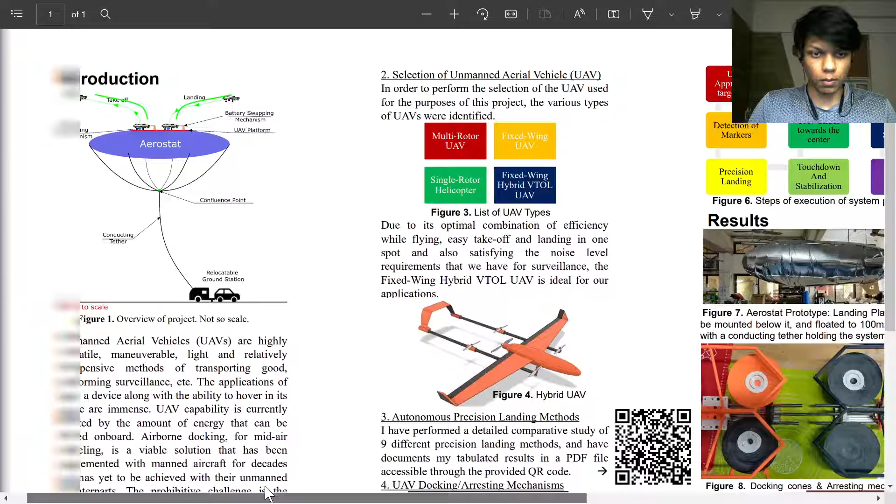So we could just take a look at this diagram right here. And here we can see that there is something that we call an aerostat. Now, an aerostat is in general just an airship that is going to be filled with a lighter than air gas, such as hydrogen or helium. Helium because it is going to be less explosive, less volatile, a noble gas.

And on top of that, we will be having a certain flat base, which we shall call the platform, on top of which we'll be having one or more UAVs. As shown in this diagram, we can have two UAVs. Now the UAVs have the ability to take off and land from and onto this platform. And while they are on this platform, the goal is for them to be able to swap their batteries out so that when they run out of battery, they're able to quickly turn around and fly back up again.

And finally, the aerostat shall be connected to the ground using a conducting tether. This tether has to be conducting as it has to be able to supply power all the way up to the top. And then there will be a relocatable ground station, which should ideally be able to take the aerostat, and rather the entire system, and move it to a different point rather easily without any more setup costs or more setup time.

But why is it that we even need a system like this? This may seem like an overly complicated solution to just have UAVs roam about here and there, but there are a few very good reasons for that. That is because in today's world, we have an increasing need for UAVs, and that is because you could have a million applications for them.

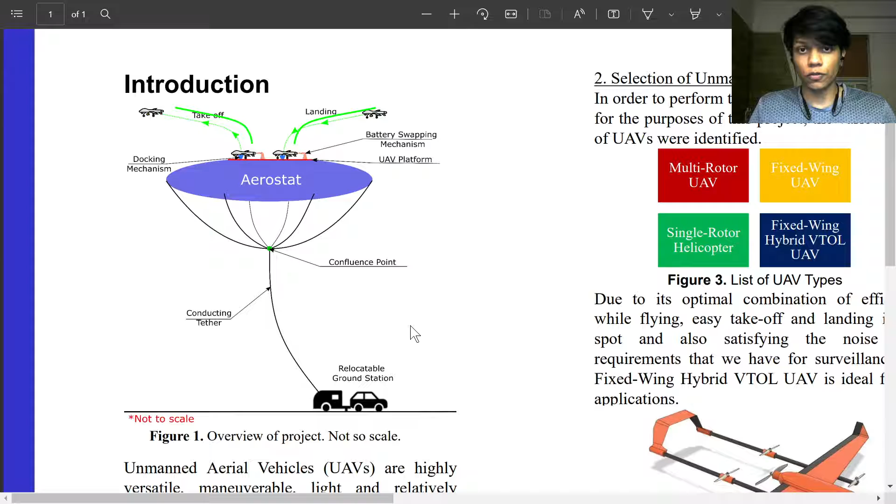You could have them in the commercial sector, where you could have companies like Amazon perform delivery of products. You could have it in the agriculture sector, where you could autonomously have UAVs fill in fertilizers and pesticides for the crops, and in fact even perform seeding of the ground. And you could also have military applications where you could have surveillance and applications like that. The applications are immense in simple terms.

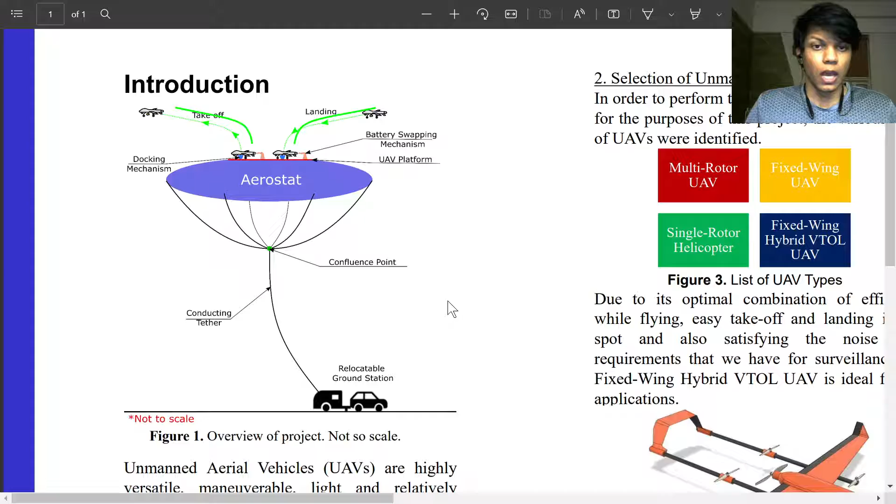But the problem with UAVs in today's world is that they have a rather short range and they require expert flyers. And both of these problems are ones that we intend to solve with this project. So with this project, what we intend to do is that instead of having UAVs be something that are piloted around by expert pilots, which costs time, money, and effort, we shall have the entire flight path be automated and pre-programmed. And not just that, the hard part of why the pilot is required in the first place is the landing, which is what we shall be aiming to make autonomous.

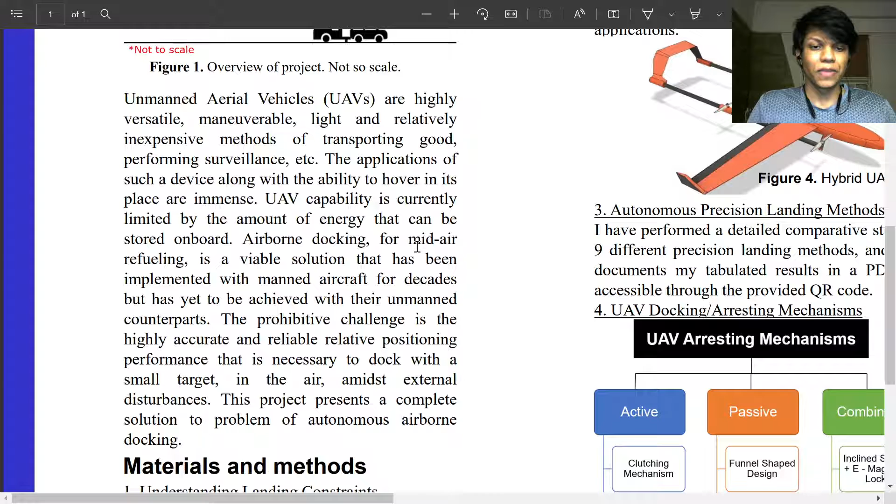And secondly, in order to solve the problem for the range, we shall have the UAVs come on and autonomously land onto this aerostat. The battery shall be swapped with a fully charged battery, and then the UAV can take off. And while the UAV is flying, that discharged battery will now be able to be charged right on top of the aerostat.

But now you may ask, why do we need an aerostat in the first place? Can't we just do this on the ground? Yes, we can. But here the entire point is efficiency and the ability to be able to deploy a UAV very quickly.

By having an aerostat at an altitude of maybe 100 or 150 meters, what we're doing is we're saving a lot of the energy it might take for the UAV to be able to go from an altitude of 0 to that altitude of 100 meters. And that VTOL part, the vertical takeoff and landing part of the UAV's flight path, is the one which is the most inefficient. And using an aerostat, we get to solve that.

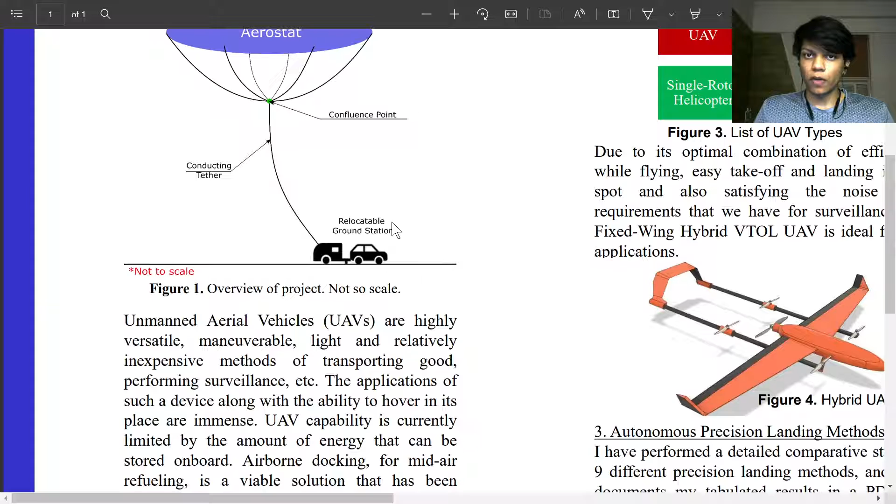So now that you've understood what the project is about, we can move on to certain parts of the project. So the way we shall proceed is, first we shall understand what the landing constraints are, such as we'll have a moving base. We require to stabilize the UAV once it lands and hold it in place, that is the arresting. The landing area is going to be very restricted because since we're on an aerostat, we'll have a very small base or a very small landing area. Attitude specific landing, that is, we cannot just land in any orientation. We need to land in a very specific orientation in order for the battery to be removable and chargeable.

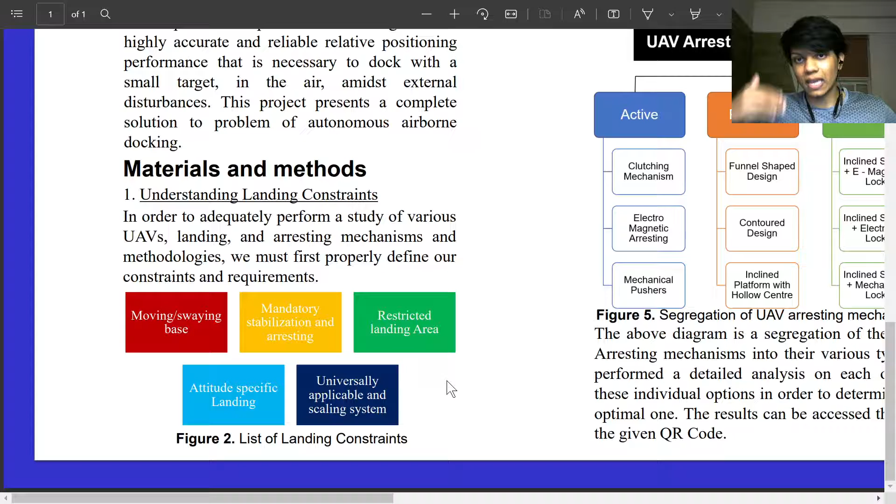And finally, we want this to be a universally applicable and scaling system. That is, this system should not just work for UAVs of a particular size, that is the ones that we've tested it for, but it should be able to scale; other manufacturers should be able to scale it up for their respective applications. Then we have the selection of the unmanned aerial vehicle.

We have four different types here. That is the multi-rotor UAV, the fixed-wing UAV, the single-rotor helicopter, and the fixed-wing hybrid VTOL UAV. A multi-rotor UAV is a standard drone. It's the one that you will see everywhere, here and there. You will see it on YouTube, etc. A fixed-wing UAV is basically something like a commercial aircraft, just without any pilots. It flies on the basis of its wings. Then we have the single rotor helicopter, which is the standard helicopter. And then we have the fixed wing hybrid VTOL UAV. It sounds complicated, but it's really simple. It's basically a combination of the multi-rotor UAV and the fixed wing UAV.

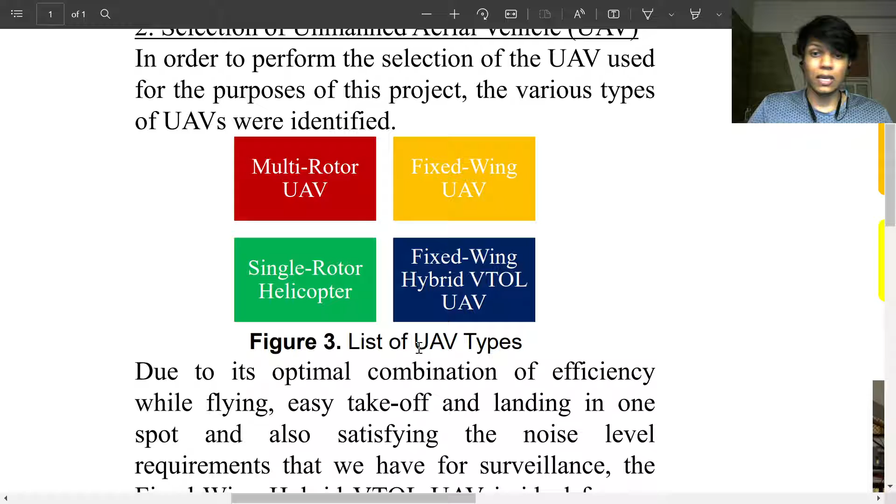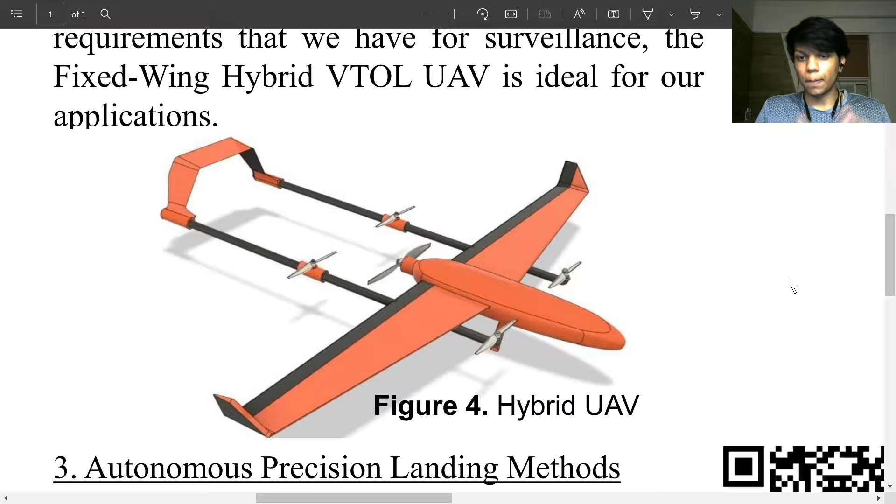Now, this is the one that we have selected for this project, and that is because the multi-rotor part of the UAV allows for the UAV to be able to take off and land very easily, basically in a vertical takeoff and landing format, that is, it can take off this way and land back down this way. And the fixed wing part of the UAV allows for the UAV to be able to fly very long distances in a very efficient manner using the power of aerodynamics, because the wings shall be using the cross section of an airfoil, and the airfoil, using the lift equation of ½ρAV²C_L, shall allow the aircraft to fly in a very efficient manner and for long distances. Due to this optimal combination, as we have written here, we have selected this hybrid VTOL UAV. As you can see here, this is a representative diagram of what it may look like.

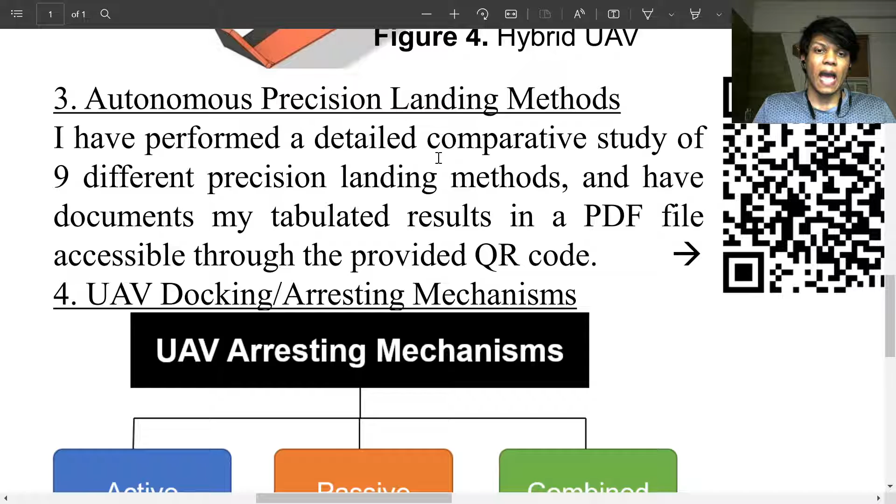Then we have the autonomous precision landing methods. And these precision landing methods are the ones which will allow for our UAV to autonomously land onto the docking system. And in order to understand what precision landing methods we have used, you can check out our QR code right here. We have an entire table which shows which are the methods that we've used. We checked out 9 different methods, and we have finally chosen the method of using Aruco markers and IR sensors in order to allow our UAV to land accurately onto the moving platform.

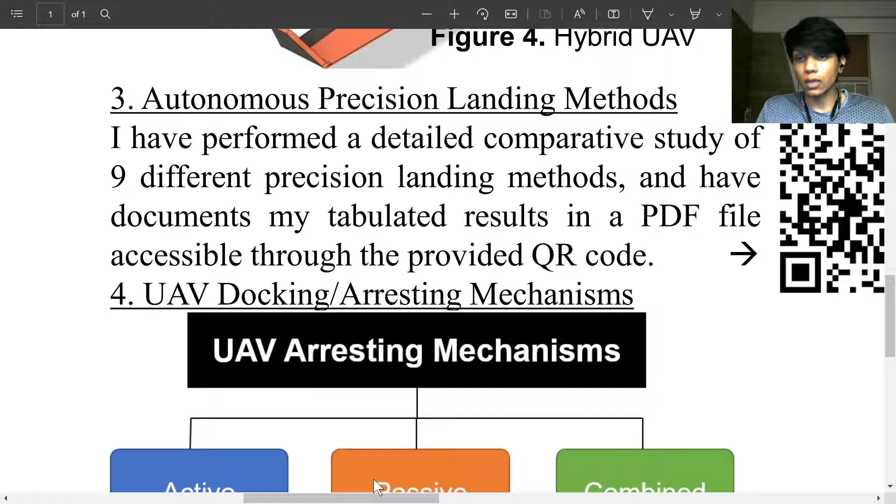Aruco markers basically allow for a computer vision system that we have coded to be able to determine the distance of the landing platform in all 3 axes, the X, Y, and Z axes, from the camera. Through this, we can give minor and very precise adjustments to the UAV in order to allow it to land properly. And the IR sensors and the IR blasters will be added for extra accuracy, and mainly to allow for the system to also work in the dark, because the Aruco markers will not be visible to the camera in dark conditions.

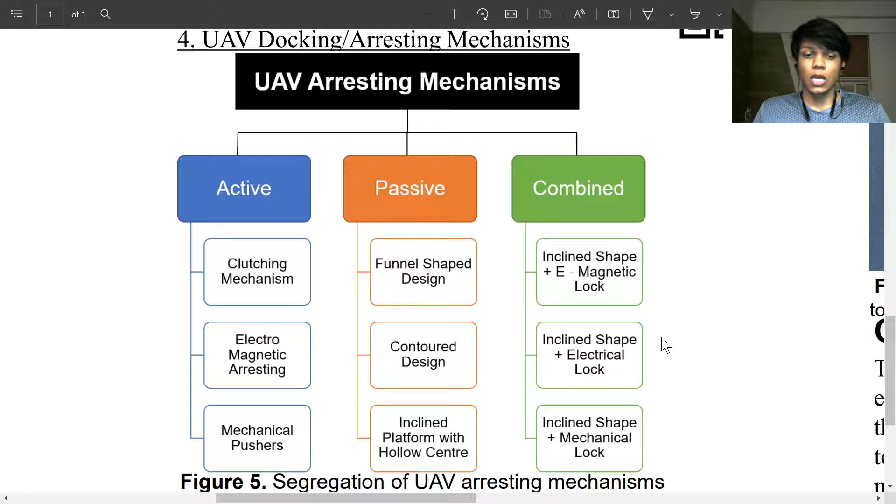Then finally, we have the UAV docking system and the arresting mechanisms. So the arresting mechanisms are the ones which allow for the UAV to be held in place after it has landed, and these are the ones that are available. They're divided into active, passive, and combined systems. We have performed a detailed comparative analysis of all of them, which can be checked out from the QR code available in the poster right here. And once we decided what we wish to do with all of these systems, we were able to finalize what our overall execution of the system will be.

First, the UAV shall approach the target area. The Aruco markers and the IR sensors will be detected. A precise landing will be carried out. The UAV reaches the arresting area, that is, it will be able to slide to the center of the cones that we have. Once that is done, stabilization will occur.

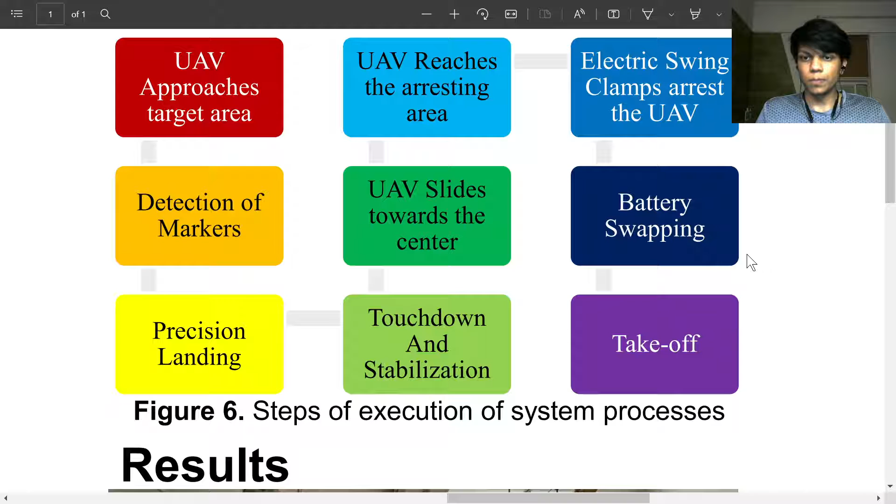Precision landing will occur, then we shall perform touchdown and stabilization. Then the UAV will be able to slide down to the center of the conical arresting mechanism that we have. Then the arresting mechanism will move to the side using a stepper motor, which will basically hold the UAV in place. Then the electric clamps that we have added shall swing and arrest the UAV. Then the battery swapping will take place, and then the UAV will be able to take off again.

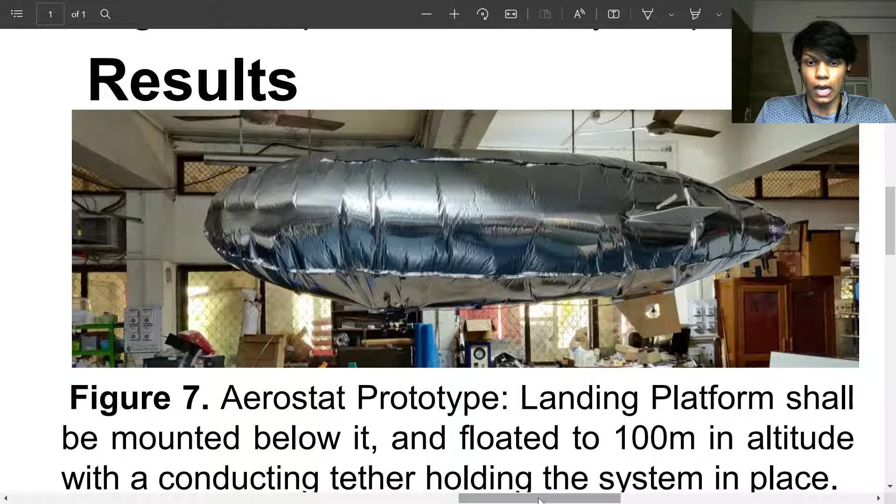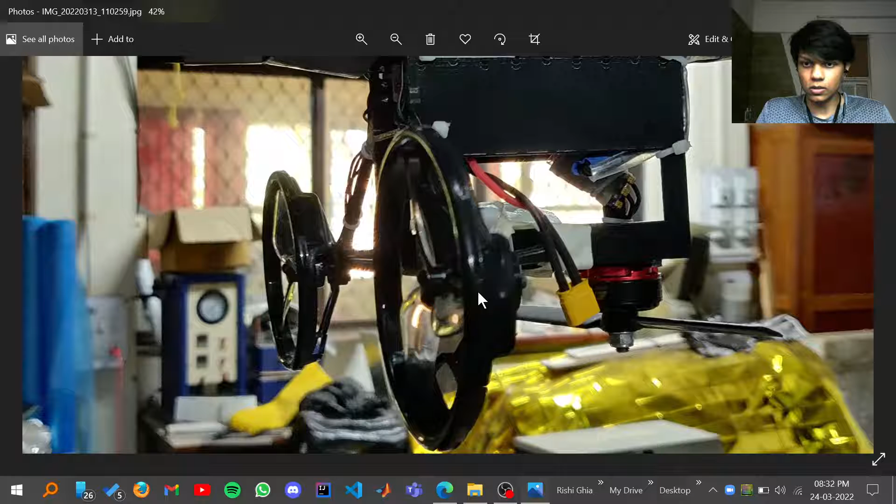Now these are basically the results and the prototypes that we have built. As can be seen here, we have constructed an aerostat and filled it up with hydrogen gas. Now a few additional photos for the aerostat can be shown right here. As you can see in this photo, when I zoom in, you have certain propellers which allow the aerostat to basically orient itself in air while it is floating. And there is also a joined propeller for vertical direction thrust.

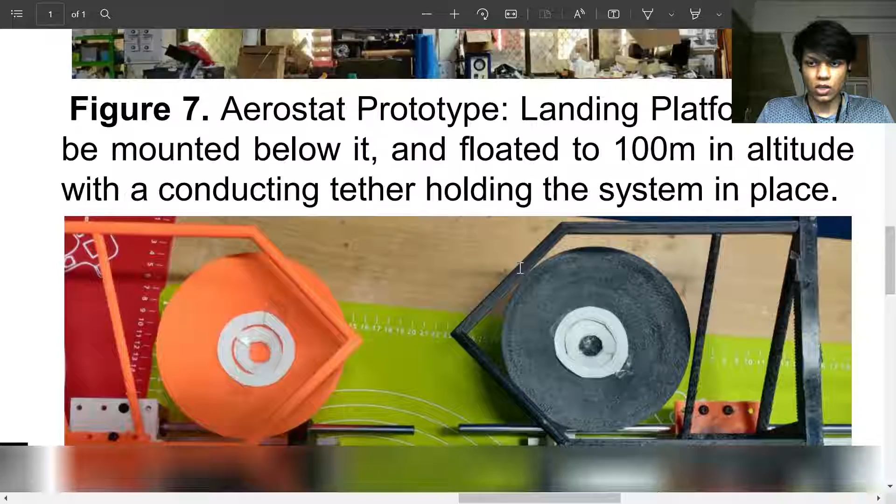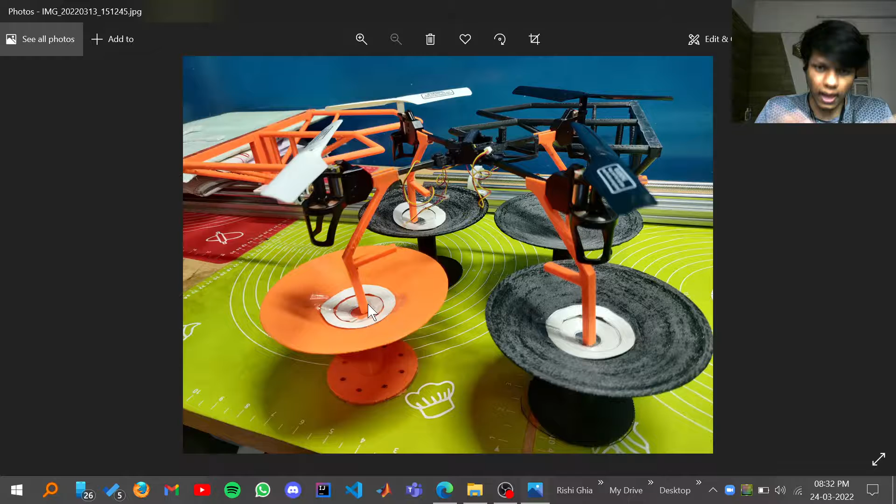Then apart from the aerostat, we have our arresting and docking mechanism. These four are our docking cones. These are the cones in which the UAV legs shall be placed when they land. And as you can see from this image right here, these cones are actually conical in shape, as the name says, and this allows for there to be a certain error. So even though the UAV may land within a certain error margin, that is these white circles, they will be able to slide back into the center in order to ensure precision.

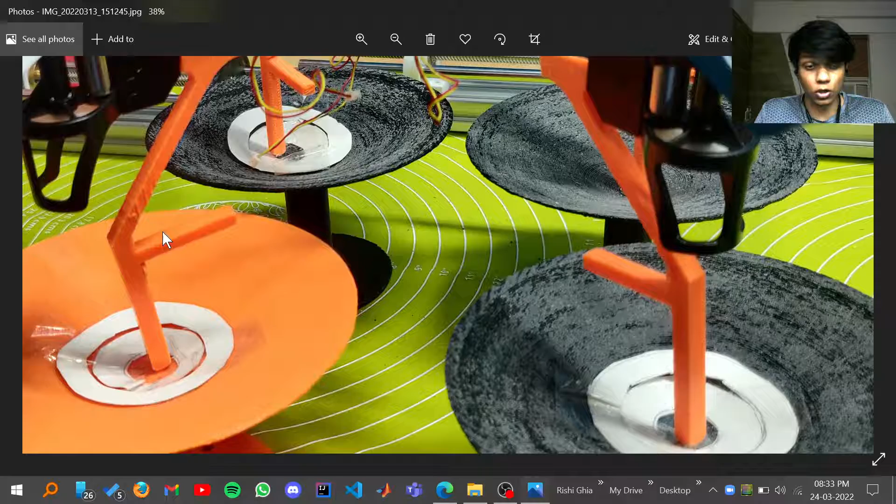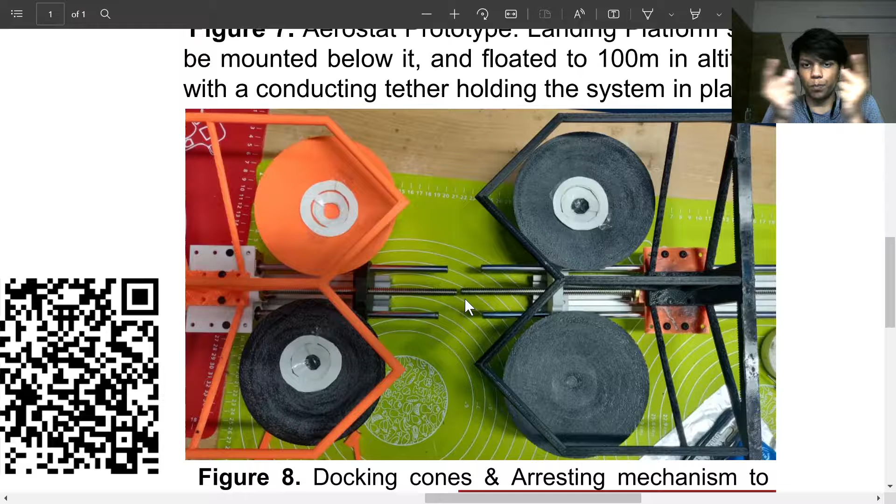And finally, we can see right here that there are certain horizontal stays here. These horizontal stays can be grabbed onto using our arresting mechanism, and this arresting mechanism using the stepper motor shall pull the feet apart, and this will be able to hold the UAV in place in highly windy conditions. And we can see that through this video right here of the docking mechanism.

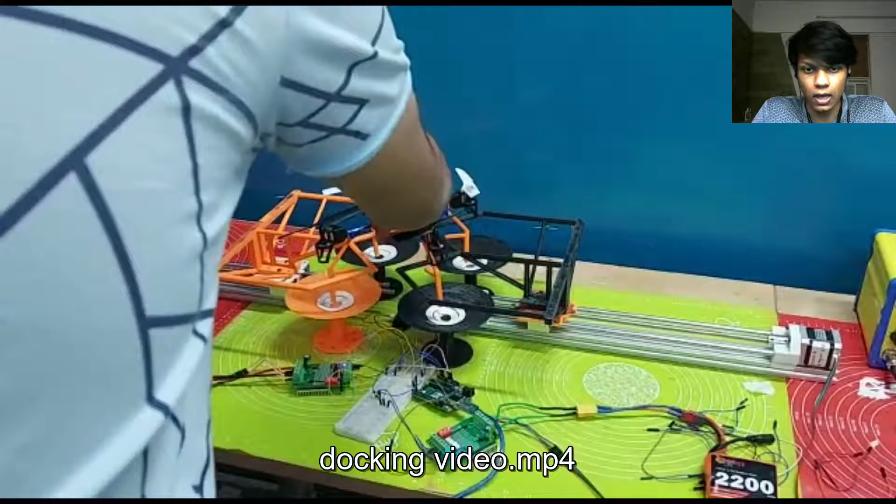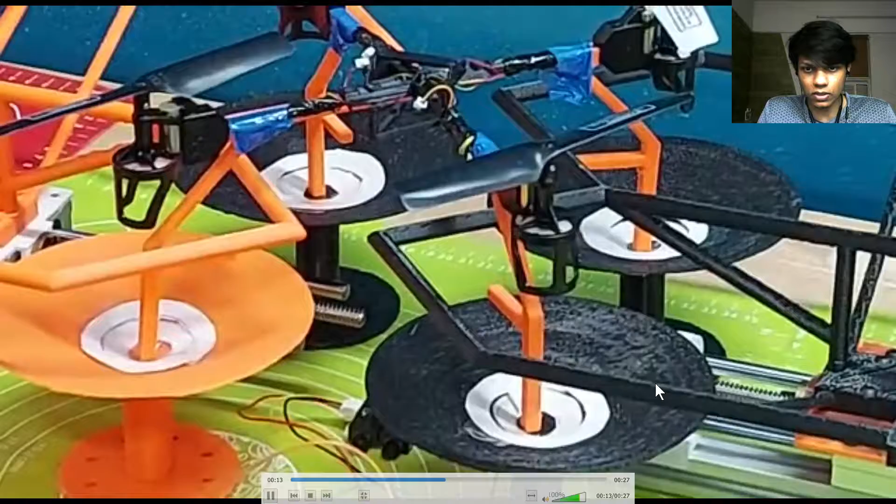So the UAV lands. We were not able to simulate the landing itself of the UAV because this was an indoor environment. But once it does, these stepper motors, as you can see to the sides, will be activated and they will pull the UAV to the end. They will pull the legs to the side, and this will allow for the UAV to be held in place in extremely windy conditions.

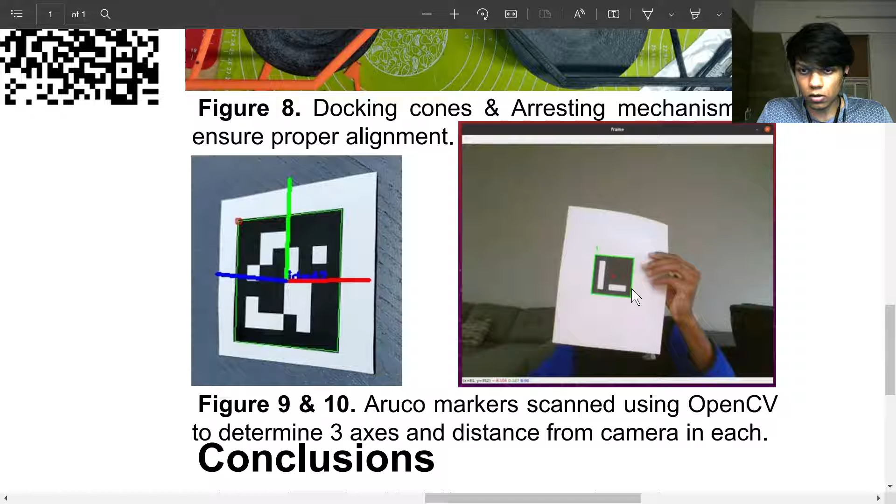Moving on, we have the ArUco markers themselves. This is an example of our ArUco markers that we have used. And as you can see, the three axes, the X, Y, and Z axes, can be spotted. And here, the ArUco marker is being detected by the computer vision software that we have used.

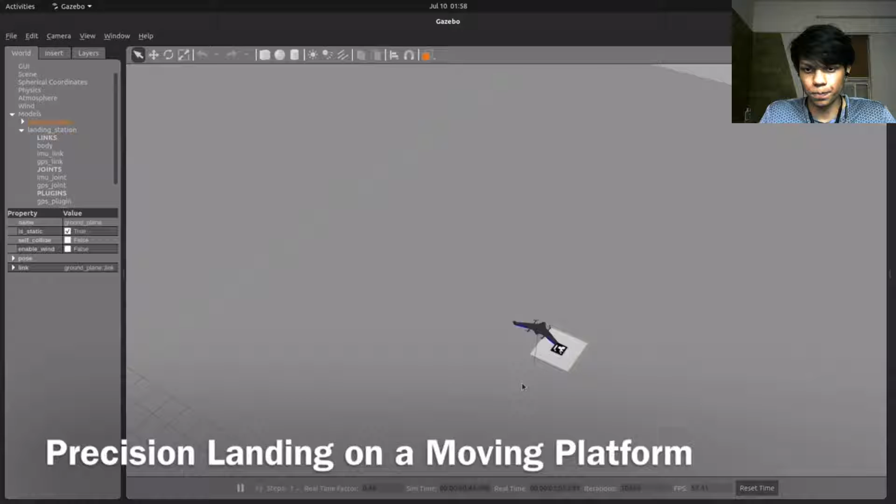Apart from this, my project also consists of a simulation in the Gazebo software, which can be seen right here. As you can see, there is a VTOL hybrid UAV that is autonomously navigating to the platform, and it detects the ArUco marker, and using that, it is able to perform a very precise landing onto the platform. Of course, there is a certain margin of error, but that is why our docking and arresting mechanism is able to compensate for that.

So as you can see, corrections are being made, and yes, it is visible. It is able to correct itself and move towards the ArUco marker. And once it does, it is able to perform a perfect landing. So these were some of the photos and videos that we wanted to show. In conclusion, we have been able to make an entire system of all of these parts. We have not been able to perform a test of the joint system, but we have been able to perform a test of all of these individual parts, as you can see.

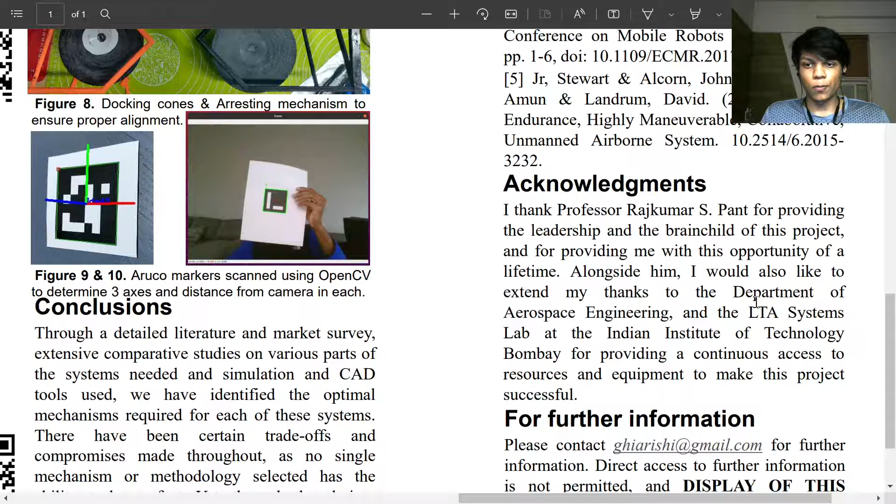Here are some of our references. And finally, here is my acknowledgement. This project was made in conjunction with the LTA Systems Lab and Aerospace Engineering Department of IIT Bombay under Professor Rajkumar S. Pant. I thank him for his leadership and for the opportunity that he has provided me with.

Unfortunately, this poster and further information cannot be provided to the public or for display, as this is purely the property of Project Hurkara and I am not allowed to showcase further.